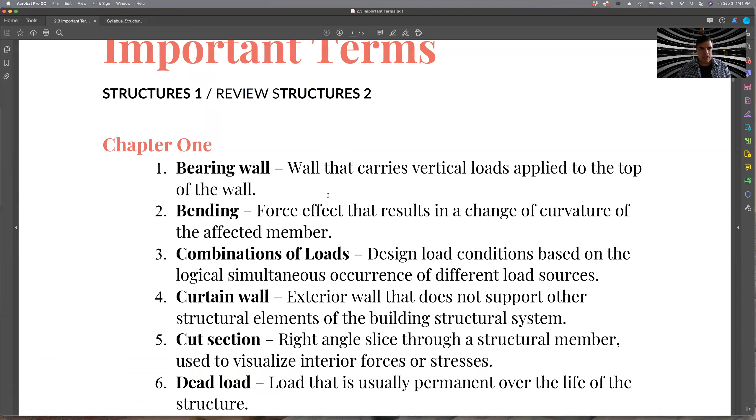Starting with chapter 1, we have what is a bearing wall, for example, that is the wall that is carrying loads that are applied; bending, that is the concept that allows you to understand how a member can change curvature. I will be doing some drawings to help understand this. If we have a beam, the beam will bend when we apply a force on the superior part of the beam.

Combination of loads, that is something that you are supposed to study in Structures 1. If we have a force that is applied to a body and we have another force, we can put them together and we will have a combination of these forces, like a summation of the different forces. A curtain wall is an exterior wall that does not support a structural element. A cut section is when we have, for example, a column or a beam, and we cut that beam in 2 parts, and we look at what happens on the left and on the right of that material, and the section will be that surface that has been cut in the beam.

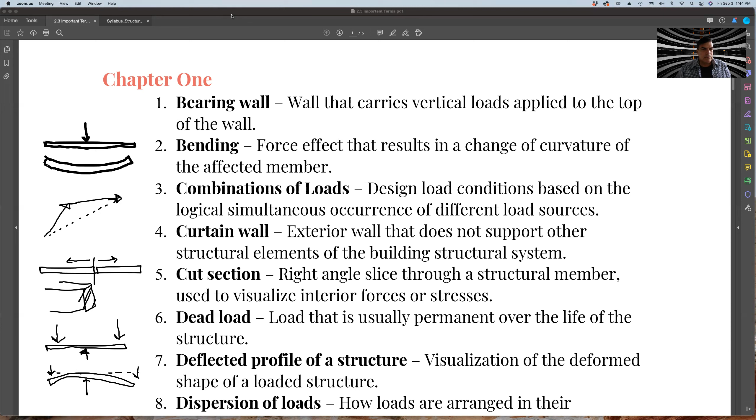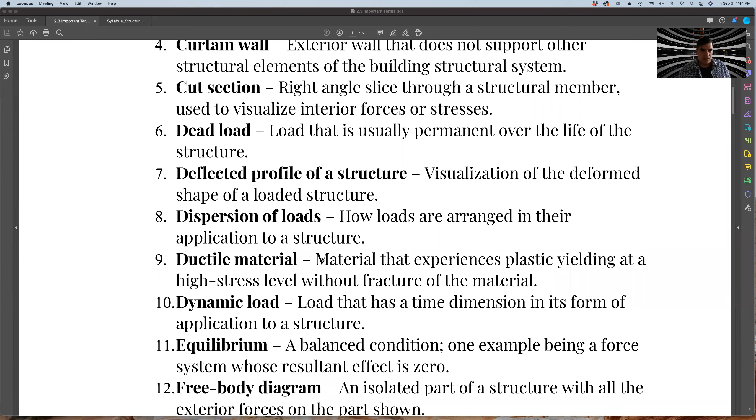We have the dispersion of loads, which is how the loads are arranged. A ductile material is the one that will experience a plastic deformation when we have a very strong stress without getting a fracture. A dynamic load is one that has a time dimension, like the wind. Equilibrium is a balanced condition when the resultant of all the forces is equal to 0. We need to understand that there are several types of equilibrium, and we are speaking about an equilibrium where we don't have movement. Free body diagram: we imagine that we isolate the structure and all the exterior forces of the structure are shown.

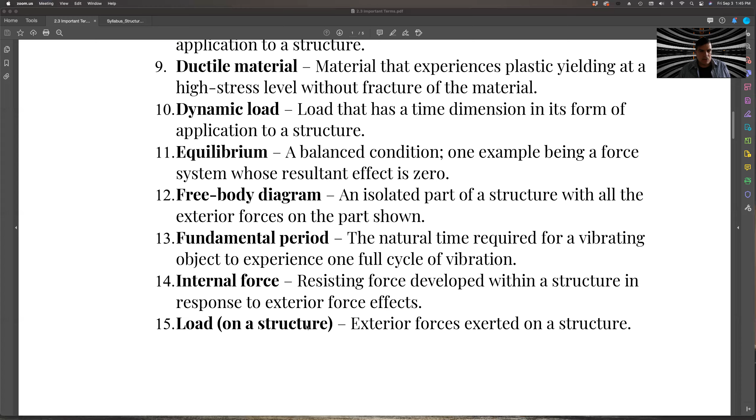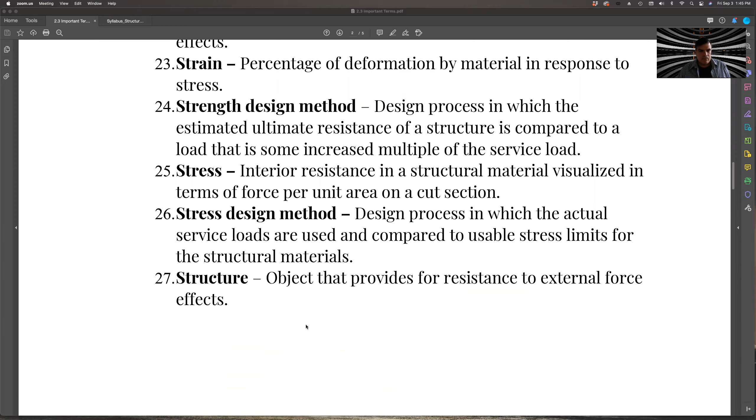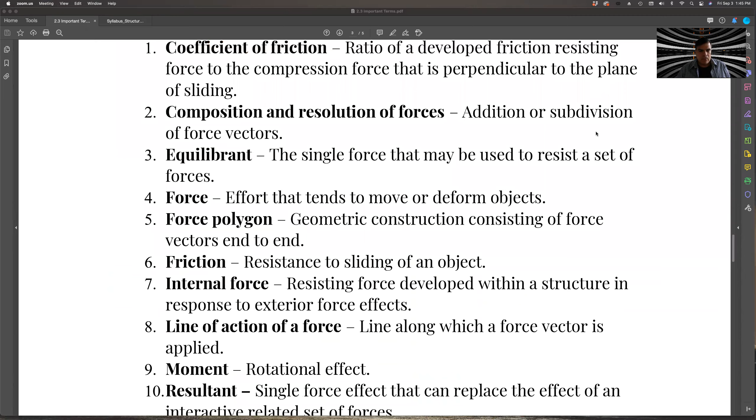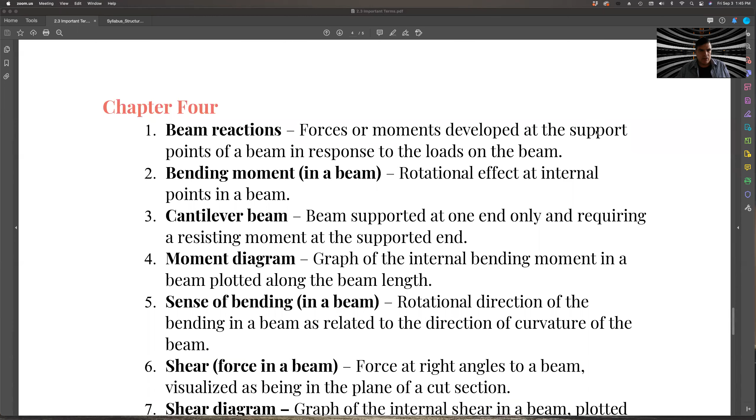A fundamental period, internal force, loads. Well, there is a lot of information, and you may want to memorize all these concepts because several of them will be on the test. Thereafter, you will see that we have the same with chapter 2. And we also have chapter 3, which is not included. I just didn't want to erase it. And we have some other concepts in chapter 4. In chapter 4, you will have the explanation of how to calculate the diagrams. I would like you guys to look at that and look at those exercises because they may be similar to the ones on the test.